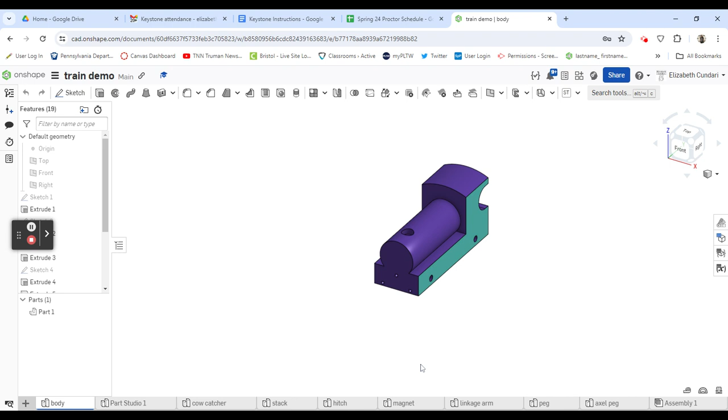If you don't have that stuff, it's okay. At some point you'll get it as you do all the different videos. So here we go. So create Part Studio, right click and rename, and this is going to be wheel.

And this one we're going to do some revolving and things like that. I'm going to use the right plane to start my drawing. So I'm going to go here, right here, and then hit sketch. You can do it in the other order, of course, it would be fine, but either way we're drawing on the right plane. We have the right view cube up. We're good to go.

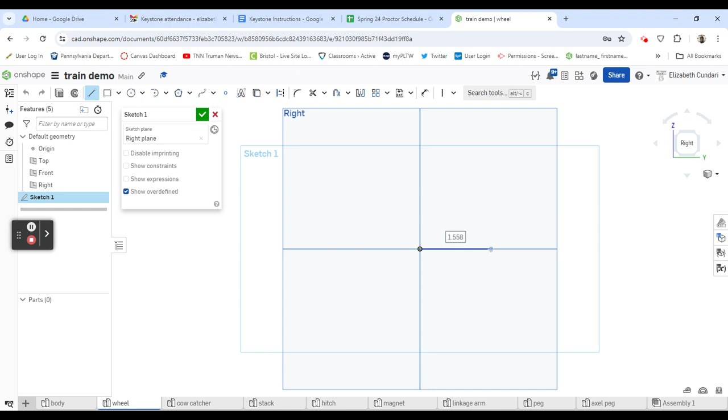Okay, so we are going to be just doing a profile that looks something like this. I am making sure that things are aligned as I go, so that I have vertical and horizontal alignments. Check this out, I want this to line up with this, right? Look at that.

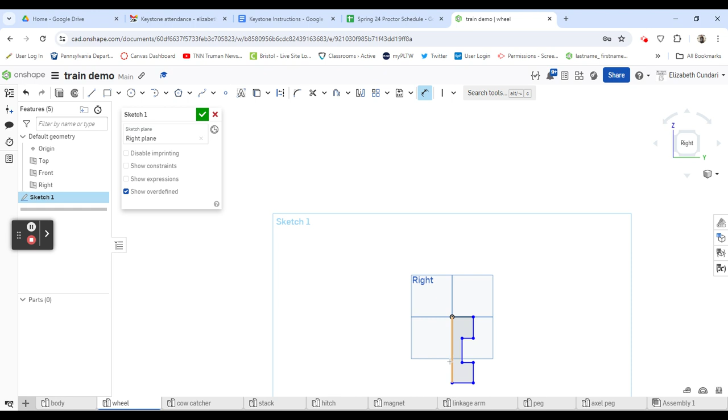Okay, so now that we have this stuff, we can go ahead and put some dimensions on it. So this is 1 inch. And then now it's starting to look like what it's going to look like. This width here is going to be something. What is it going to be? 0.25, so 1/4 of an inch.

This, and you'll see both of these moved. That's because they were aligned. If for some reason you did not align them, you could go here, click on this, or this, or this, you know what I mean, and it will line them up together, and then you'd be good to go.

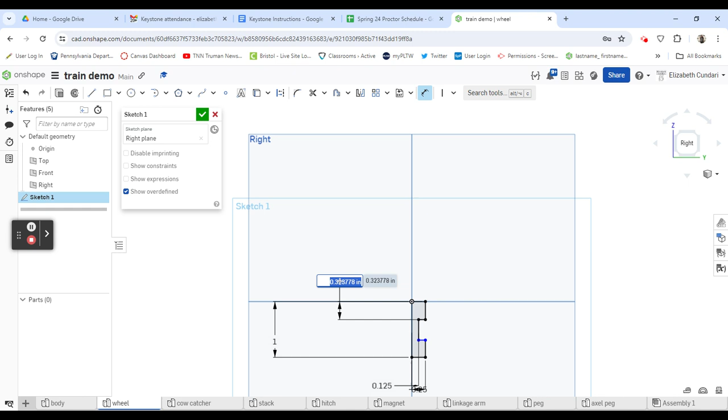The distance from here to here, so that little tiny distance there is just 0.125, so it's half. And then we have some distances from the edge to the center, so that's actually from here to the origin. So this one is going to be 0.25. And then this is going to be 0.75, which essentially means 0.25 in the other direction, but I'm doing it from the edge to the center. So I went from here to here.

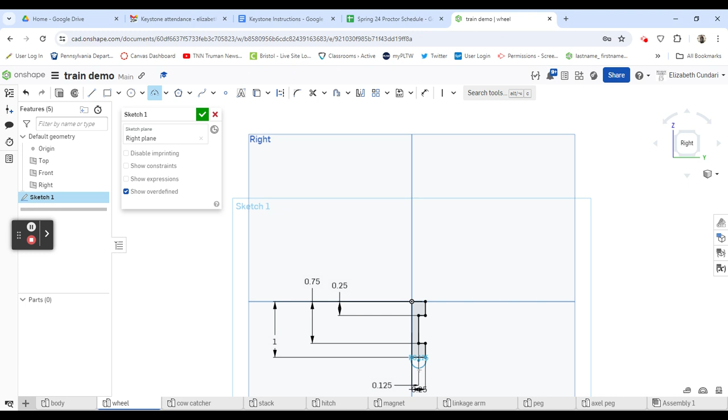Okay, we're going to put some 3-point arcs on here. The first one is an actual 3-point arc, and then the others are going to be fillets. So we're going to go here to here. And then look, if you bring this into here and have that aligned so that it's doing the constraint, you're good to go, it's all done.

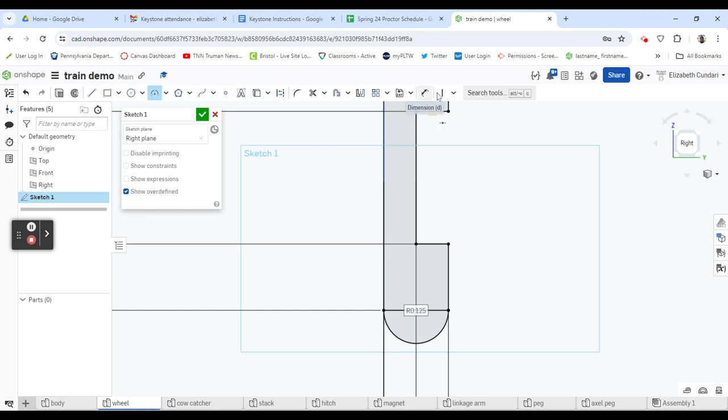Okay, so it says your radius is 0.125 and it forces it. That is correct, so if you have that, you're in good shape. If you didn't align it, then you're going to have to go through and do that through either the coincident or midpoint or something to that effect. But that allows, if you put the dimension in, I'll show you. If I put this in, it's already there and it's gray because the 0.25 and the fact that it's aligned here creates that. All right, so now we're going to do the fillets.

So the first fillet I'm going to click on, it may turn red and be weird. That is because it might be trying to fillet bigger than the space. I recently did this, so it's already got the number in there from last time for me, which is nice. But I'm going to hit enter once, and then I'm going to go ahead and put the number in. So the number is 0.0625, and mine's going to round up because of where I have my digits.

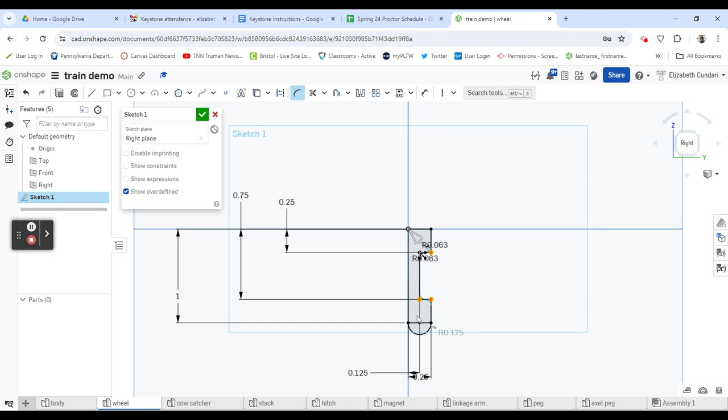It's totally fine. So now that I've done the one, when I click on the other ones, it naturally already has decided that's the fillet that I'm going for, the dimension. You're in good shape. If you have that, you're all set, and you can just hit enter, and you're good to go.

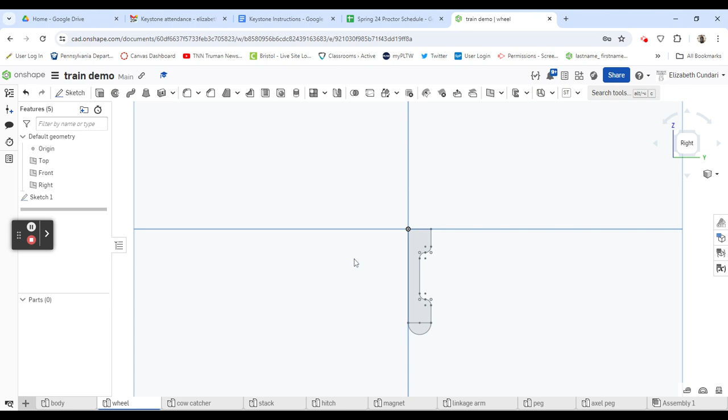Okay, so hit enter. So if you have all of this and you have these curves here, you have half of the wheel, the profile, you're good to now do a revolve. So we're going to go here, and then we're going to go here, and there you go. You have the beginnings of a wheel.

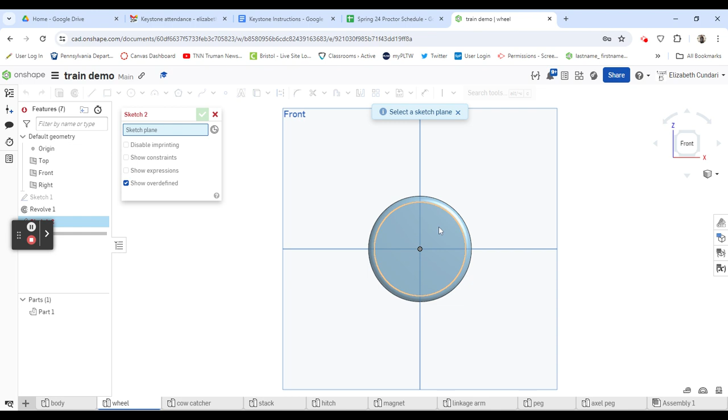It's pretty exciting, right? All right, so we are going to be working on this back side, which is for me is the front view on the view cube. So I'm going to go to front on my view cube, go to sketch, and then click on this circle. We're going to be making a shape, and then we're going to be making it, patterning it. You'll see.

I'm going to go right ahead and just go from one side to the other. Whoa, what's it doing? Why did it do that?

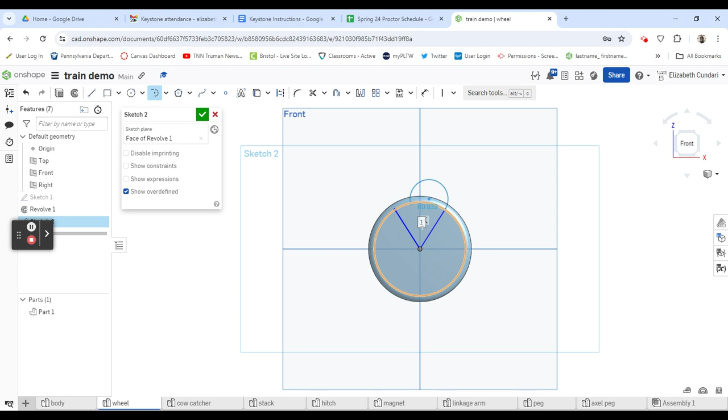Okay, it tried to align something, and I'm a little nervous about that. We'll see what that does in a second. It's always doing weird things. The last one I'm going to do is put a center line from here to here, and I did it as a construction line, just to help myself out as we go through this.

Okay, so the first thing we need is a dimension from here to here. This is 30 degrees.

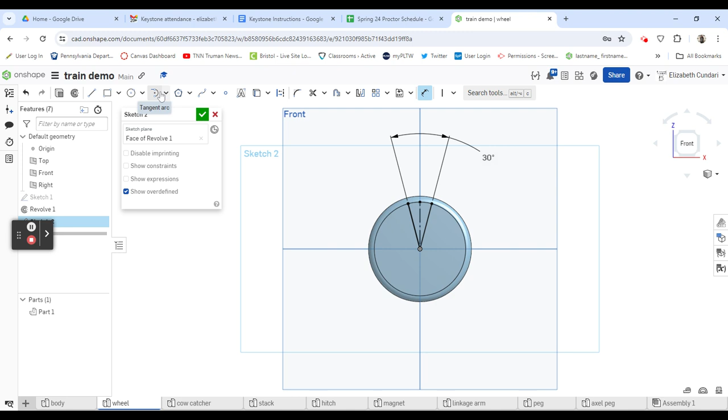Okay, now we're going to do a 3-point arc. It's always trying to do that tangent arc now. It's like a new thing. Okay, I'm just going to kind of do it from here to here, 3 points. And I'm going to do another 3-point arc from here to here. Just make sure you're not tying anything into anything else so that you can sort it out.

So the radius for this is going to be 0.625. And then the radius for this is going to be 0.375.

And it's okay that it did that, we'll sort that out in a second. We need the distance from the front to the back. I'm looking to see what that would be in these holes. I don't know that I have that. You know what it is? It's because these are concentric.

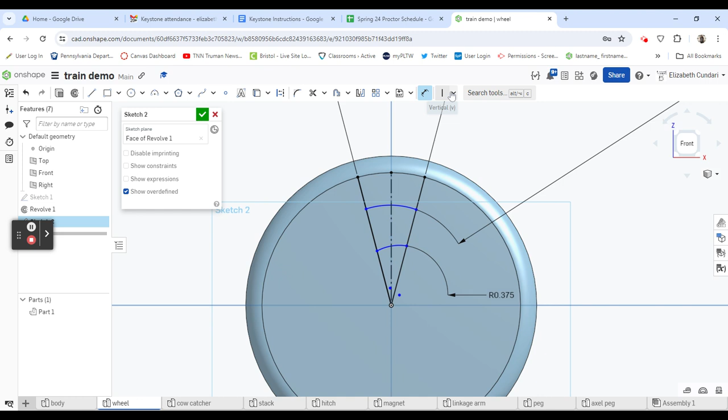So watch, you don't need anything else, all you need is the concentric rule. So I'm going to click on this and then click on this, and then I'm going to click on this, and I'm going to click on this. You could also do the circle on the outside, and that would do concentric as well.

Okay, so these guys are concentric. This is all cut out, we have those lines. There's a hole in the center, so I can do that at the same time.

And that dimension is 0.28.

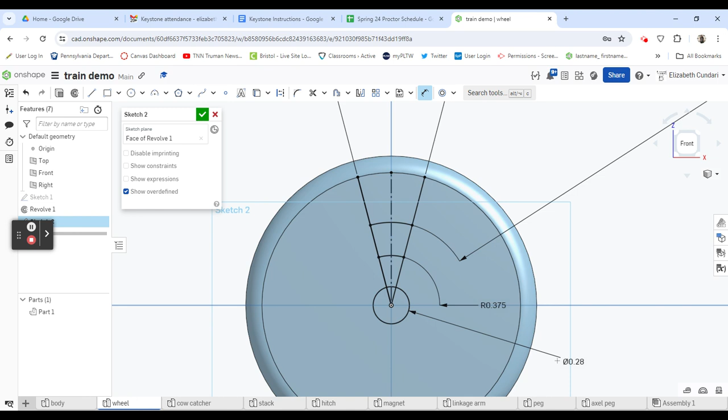All right, it looks like I have everything. I'm just double checking to make sure there's nothing weird that I missed. I like it, I'm going to go ahead and hit check.

I'm going to extrude, remove that. And ooh, look, I got to get that little triangle too. I'm going to say through all. And there you go, that piece is cut out.

I'm not done yet, but that gives me the first piece I need to pattern this. So there's going to be 6 of those. So let's go to here and drop down to circular pattern.

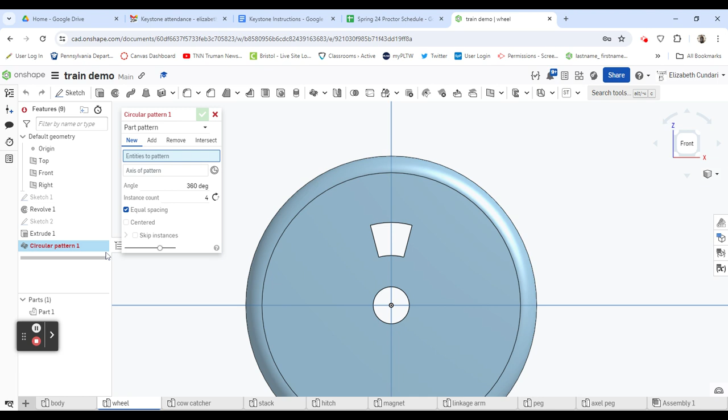It says, what do I want to pattern? I'm going to say feature. What do I want to pattern now? I want to do that extrude that I did. I put the circle in the same extrude. It doesn't matter because it's the center. Okay, so just keep that in mind, that's part of what's going on there.

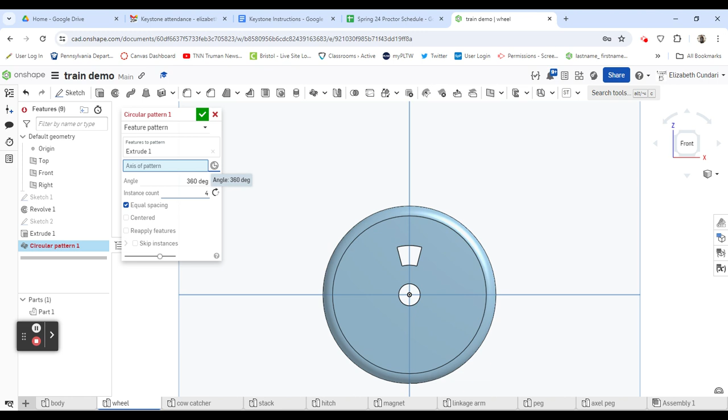And then my axis, will it let me? Let's see if I do this. Oh, you know what I can do? I can do the circle. So an axis doesn't have to be, I can turn that off. An axis doesn't have to be a straight line or anything like that, it can be a circle like this.

So if I click on this, you will see that it does this. It's a little annoyed with me. That's okay, we're going to make it 6. Why is it annoyed with me? Equal spacing, hit enter. And then we're going to say reapply features maybe. There we go, so it's just because I didn't grab the sketch as well.

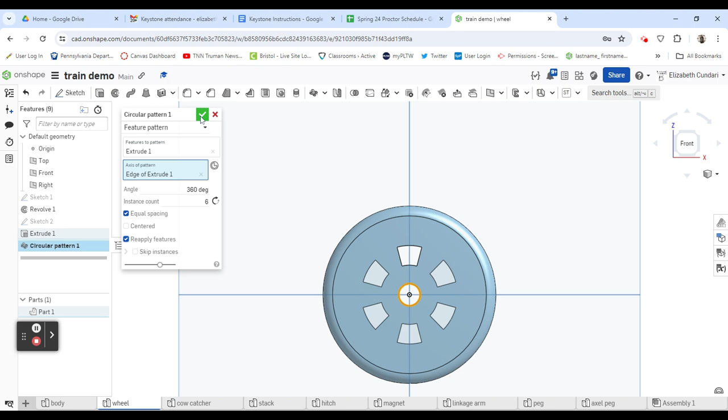But they've said this is, again, new functions with the new updates on Onshape. All right, we are good. So this is what I have. It's done, hit check.

So if you were to double check things, you do not need to do this, this is just so you can see. You would see on this that this line to this line, this to this is not dimensioning for me.

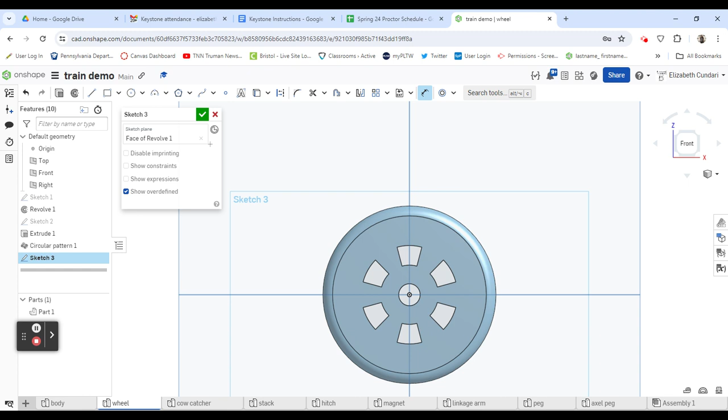Well, it should be 30. Everything would be 30. Obviously it's even, so it is 30, but for whatever reason it's being weird. We're going to move on. You guys don't like that stuff anyway.

So right now we have everything cut out. We do have to put the little attachment on here that's going to give us the opportunity to connect the wheel to the follower, the linkage arm thing. So we got this. We're going to go ahead and put in a circle, and where are we going to put it?

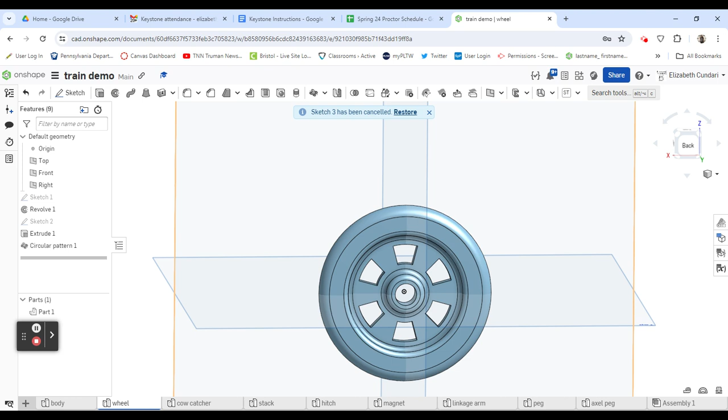Let's talk about what we're doing. We're working off of different planes. I'm going to go with the front plane here, so let's go sketch, front plane. And because of the way I built it, I'm on the back—it's interesting, if I ever make this video again I'll switch that around. We want the circle to be in the middle of these two pieces, not up here. So when I go to build it, I'm just going to align it with there and go like this.

And that circle has a dimension, so let's put that in. The dimension on that is 0.25. Now the distance from the center of the circle to the origin, we need to put that in too. We want this to be fully defined—if you don't see it fully defined, it means you're missing something. That's 0.7.

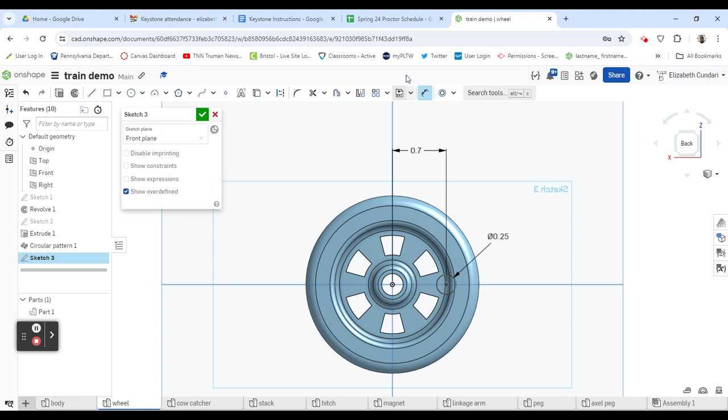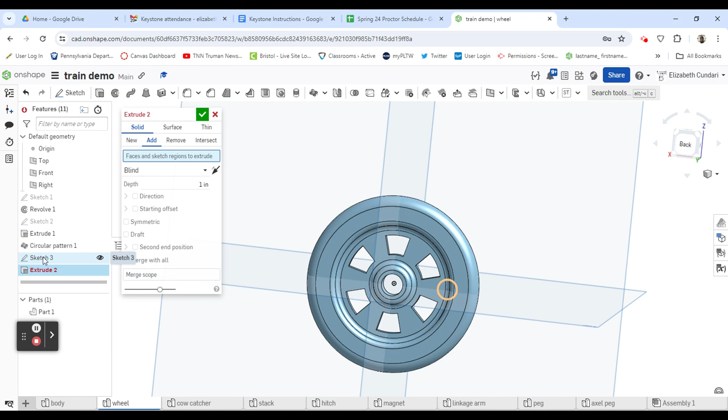Okay, that looks good, so I can hit check. And I want to extrude it, but how am I going to extrude that? Because it's like it exists, but it's not, it's there but it's not there, right? So we need to be able to access that sketch. To do that, this is how we're going to do it: we're going to hit extrude, add solid, and where it says faces or sketches or wherever, we're going to actually just click on the sketch on the left. You may find it's hard to do when you're in there, but you can definitely do it.

Now, because I have it backwards—we're working on the back instead of the front—I have to flip it. There we go, looks good.

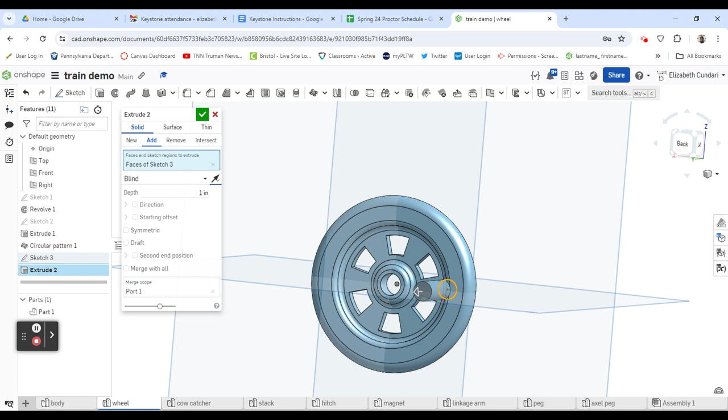Okay, so now the distance for that larger piece is 0.375. Hold on, I hit enter too quick. 0.375—I'm just looking to see if that, oh, it didn't do it. That's why. 0.375. So that 0.375 on this dimension seems like it's the distance from the middle.

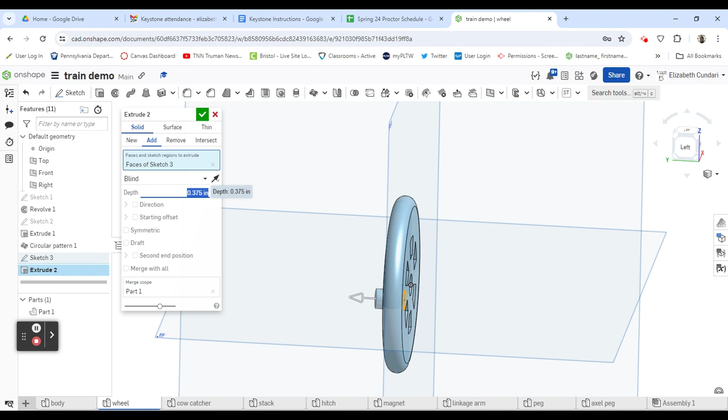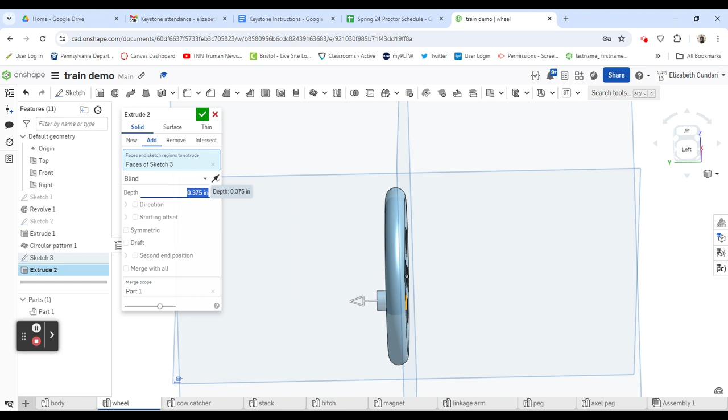I'm just looking to see if that's the whole thing or if I needed to go further out. To me, that looks right, but it's a little bit lower. So maybe I do need to add 0.125 to that. If you were to add 0.125 to 0.375, what would you get? You'd get 0.5. Let's see, I think 0.5 looks better. All right, I'm going to hit check here.

So that sticks out. Now we need another piece that's going to stick out on top of that. So I hit back, zoom in, sketch on the face of this. Go ahead and do a circle. Put that—see how it does that concentric? Go straight for the concentric. That's perfect. Dimension it.

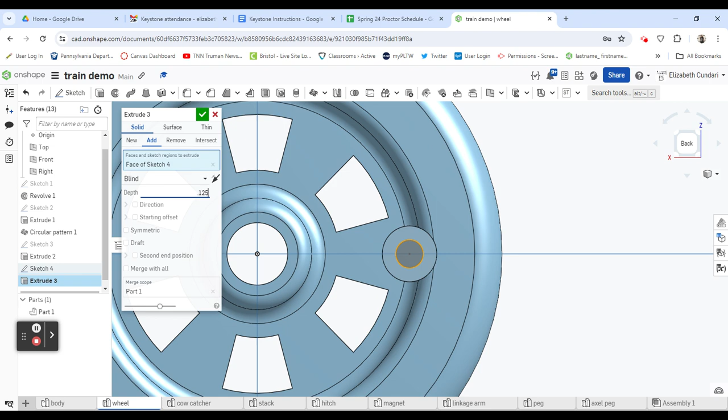And that dimension is going to be 0.125. We're going to hit check, we're going to extrude it, and that little extrude is going to be 0.125. I love how so much of this is consistent, that we use the same numbers—it's all parts of an inch, you know.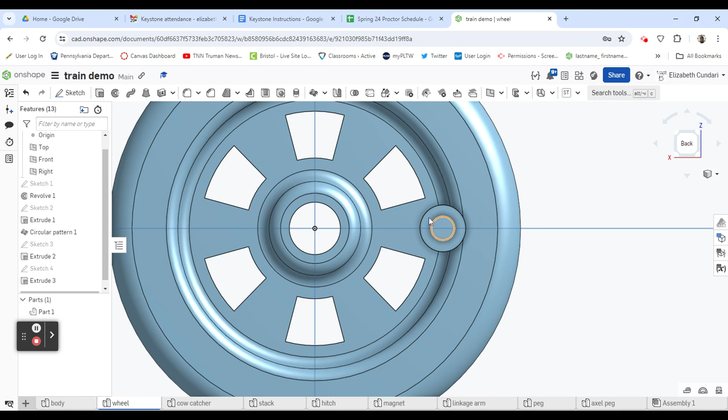So, okay, so we have that now. In the old videos we did it as a drill hole. I am not going to do that because our drill hole, the new drill hole, is more complicated than we need for this. This is just an extrude remove going on, so we're going to do that.

We're going to add another circle and we're going to dimension it. So the circle for this is 0.0625. And it's okay that mine rounded up, it's no big deal. Hit check, and then extrude, remove. And we're only going in 0.25.

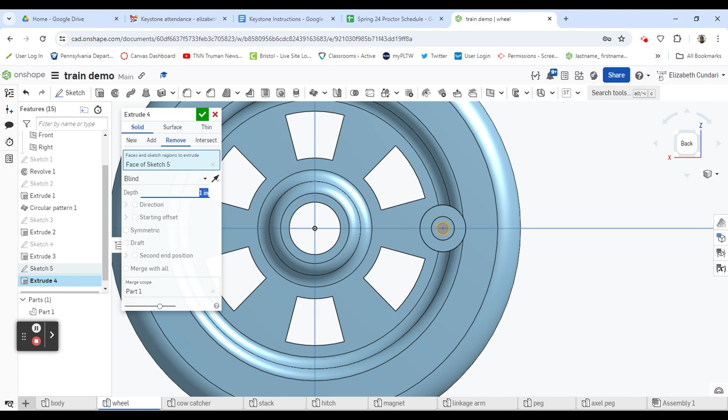So there you go—that gives us the piece that the linkage arm is going to connect to, and this little piece is where that peg is going to go on top. Other than that, this wheel is done.

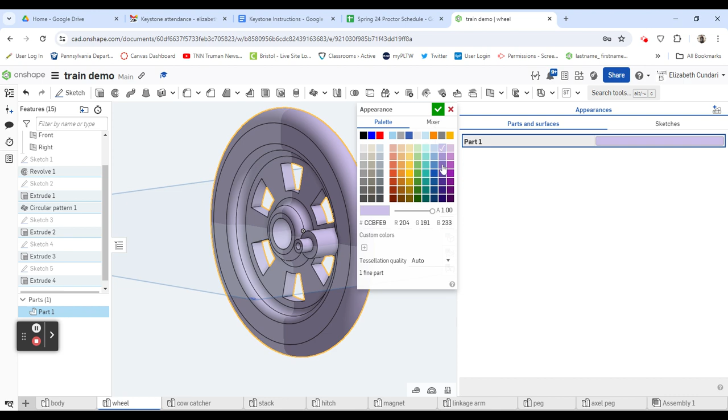So the only thing we need now is to do a color. Based on our colors, I don't know, I feel like we're kind of all over the place. I'm going to go with this. Okay, we'll go there. And that's it—your wheel is ready.

So congratulations, you've built every single part. In the next video, we will be putting it together.